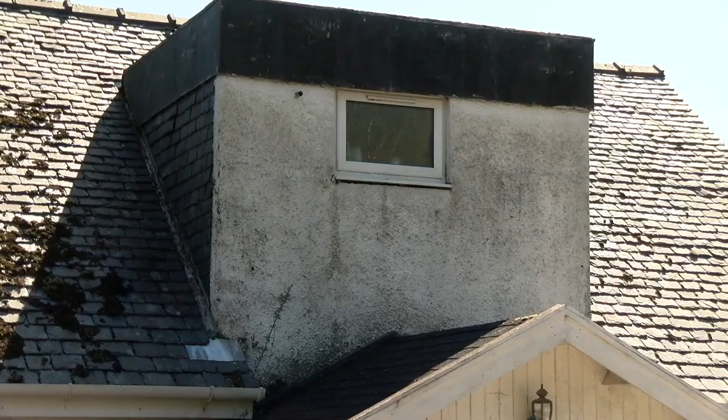This is a nearly completed EnerPHit of a 1975 timber frame house on the west coast of Scotland. We had been living here for 5 or 6 years before we decided to start the retrofit, and the motivation for that was on multiple fronts really. The house was too cold, it had damp and mould problems in places, it was expensive to heat, but also upstairs the space was really poorly laid out. It's what's called a 1.5 storey house, which is very typical for around here, where the slope of the roof comes down to meet the ceiling of the ground floor. And so the floor area available upstairs is quite dramatically reduced compared to the full footprint of the house.

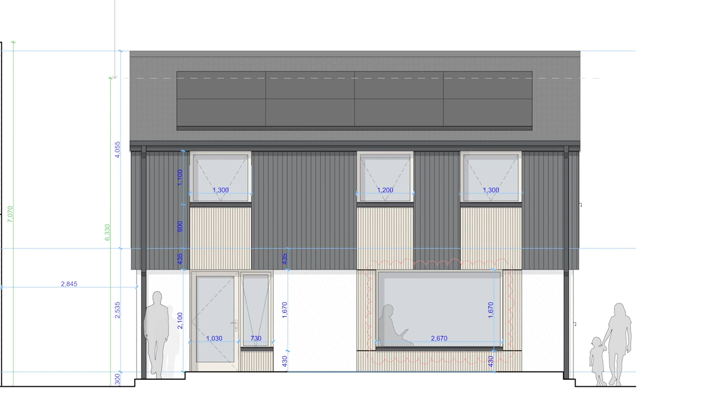The retrofit that we did was very radical in many ways, but addressed that. We did think about whether we should sell the house and build new elsewhere or knock the house down and build new here. The location where we are is really great for us. It's walking distance to schools, cycling distance to town, so we don't need to use the car much at all. It's 5 minutes walk to a train station if we're going further afield. So the location was really key for us, and that was the reason not to sell and build somewhere else. And then the question was, do we knock down and build new, or do we retrofit?

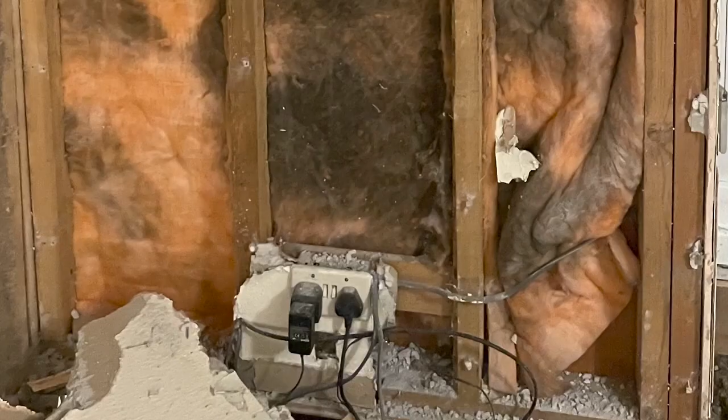And I'm pretty sure that what we did was cheaper than knocking down and building again. But also, from a conceptual point of view, knocking down buildings that have still got plenty of life in them feels the wrong thing to be doing in terms of carbon emissions, and using resources wisely. So yeah, we chose to retrofit, and before we started we knew that we had a problem with damp. We would get mould in the back of cupboards and in corners and sometimes around windows, and when we stripped the house back we realised that the problem was much more extensive.

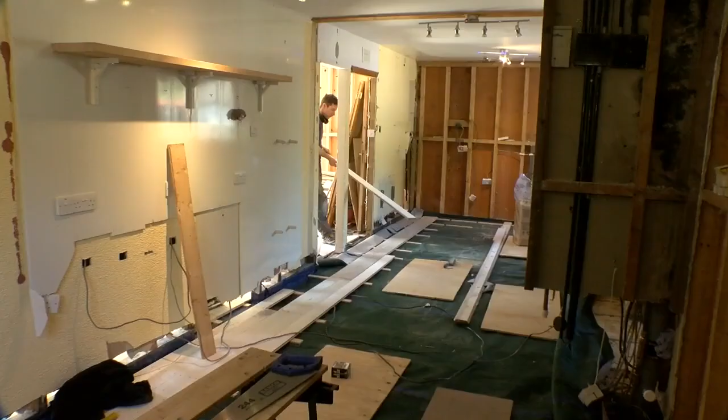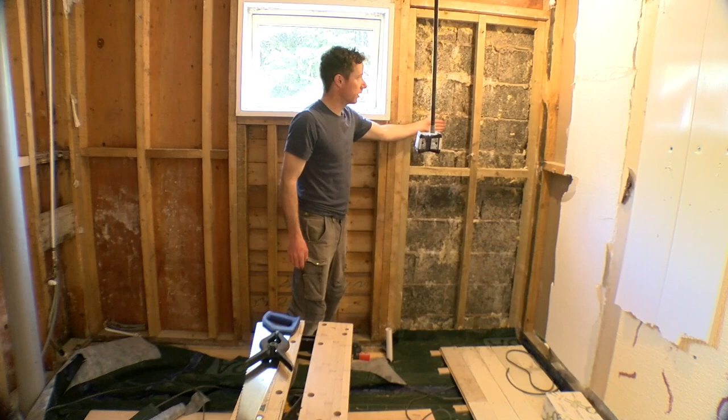We discovered quite a lot of pretty badly done work. This bit here used to be a doorway, so at some point it was filled in before me. And then the way that a timber frame works is that you want to have a ventilated cavity between the blockwork and the timber frame. They just filled this with insulation flush with the blockwork. They didn't reinstate the ventilated cavity, so that got really, really damp, and there was lots of black mould and had plants growing in it and all sorts of things.

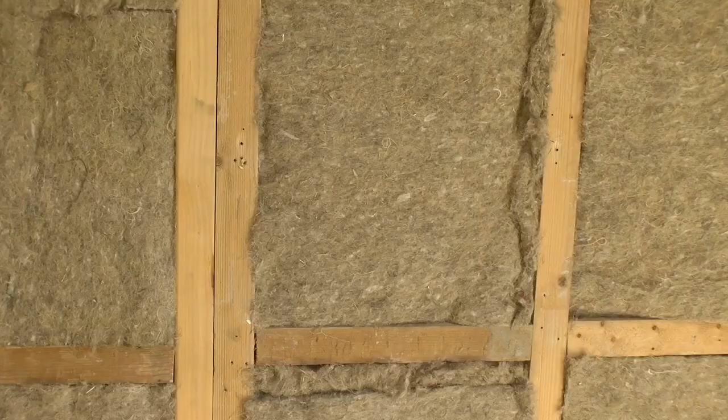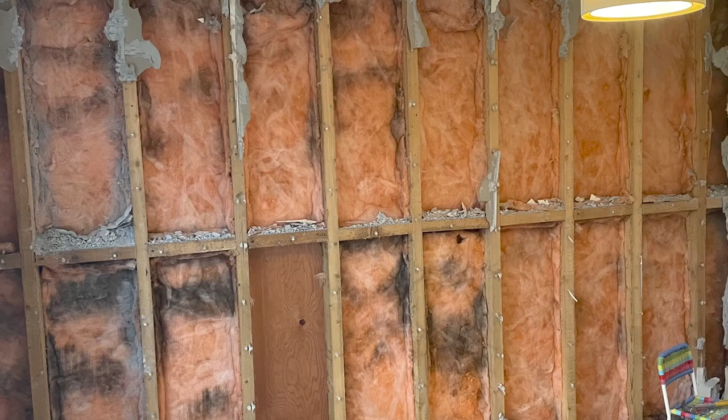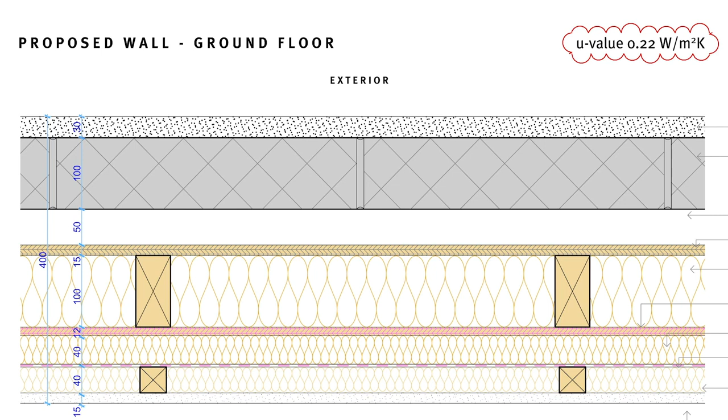And then we're going to have another 40mm of wood fibre board inside that, and then an intelligent airtightness membrane. Most of the time that acts as a vapour barrier, so it stops moisture from the room getting into the wall build-up. But in very sunny weather you can get something called reverse diffusion, where the sun is shining on the wall outside and it drives moisture from the outside of the wall through to the inside.

And because I've not been in control about what the sheathing board was on the outside, because that's pre-existing, I want the wall to be able to dry out in both directions. So I'm trying to make a wall that is very moisture robust. So I'm using hygroscopic and vapour open insulation, and then I'm using a vapour barrier that is variable so that it can dry out in both directions.

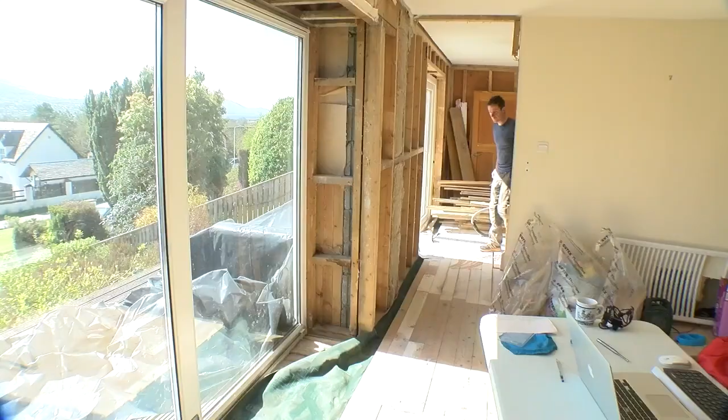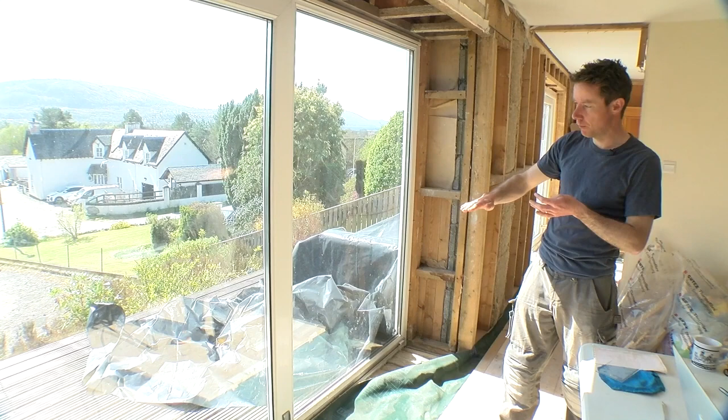So this is the living room, and we've got two big changes we're making here. When you're sat in a sofa over at the other side of the room, the view of Ben Nevis is split by this mullion, which always seems a shame to me, so we're going to replace it with a single piece of glass. Make it a bit higher off the ground to reduce solar gains in the summer, to reduce the overheating problem, because this room already overheats a bit on sunny days. So that will help a little bit with that.

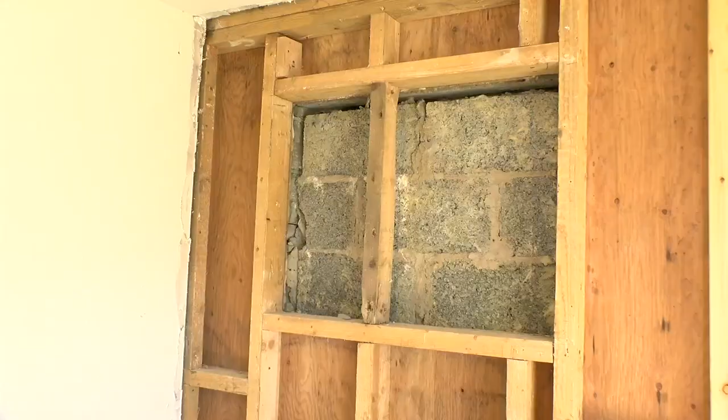We're also going to be putting another window in over there, where you can see there was a window before. I don't know why they took it out. We're going to be putting an opening window in there, so that'll even the light out a bit in the room nicely, and will enable us to cool the room when it gets too hot, because with this sliding door we found that you didn't really want to leave a whole sliding door open, so it would just get really hot in here in summer some days.

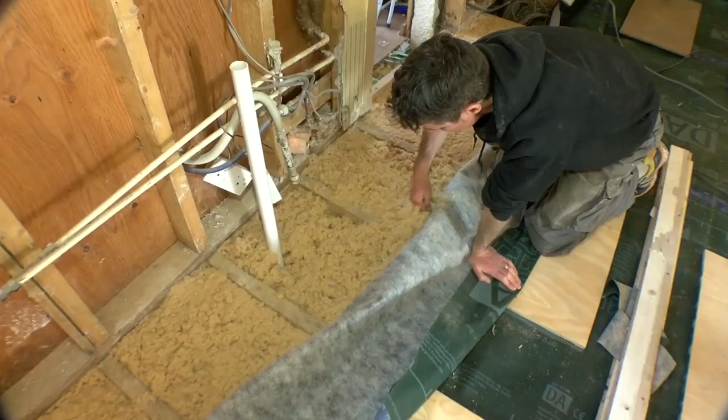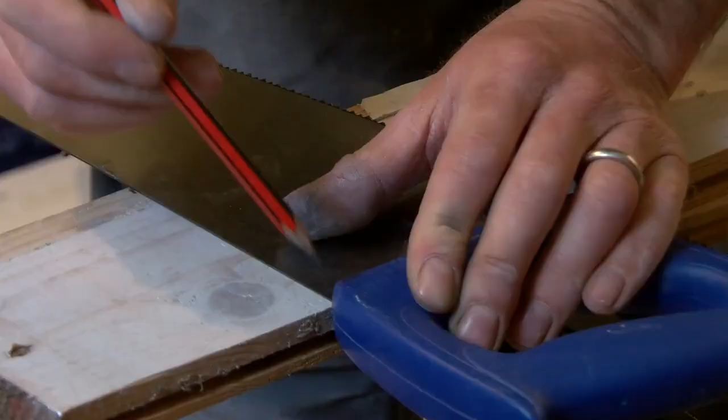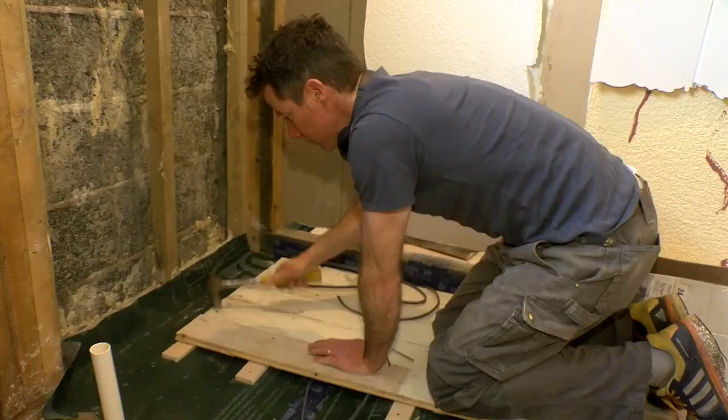Lots of what I did early on, well, everything that I did early on was DIY by me, and I always wanted to stay doing the insulation and the airtightness and the MVHR installation, partly as a kind of professional upskilling for myself, and partly just because I think those are the areas that the existing building trade is generally lacking lots of experience in, and I wanted to make sure that it was done really well. But I always knew that the bigger things that we were going to be doing in terms of taking the roof off and rebuilding that first floor, I was never going to do those as a DIY job. So we employed a local joinery contractor who were interested in doing Passivhaus and had some existing experience on it, and were keen to continue learning there.

Generally, clients doing part of the contract for us is a bit of a no-no, basically because it can complicate the contract sometimes, and also, your client-contractor relationship can get a little bit frayed if you're not moving in the same direction. But due to Es's background and experience with Passivhaus and EnerPHit, we knew that having Es would probably be more of a benefit to us than a drawback. So it was quite an easy decision on this project to let Es come on with us and work together.

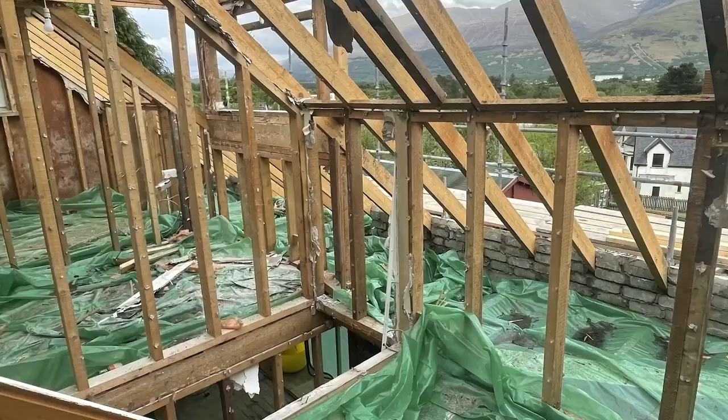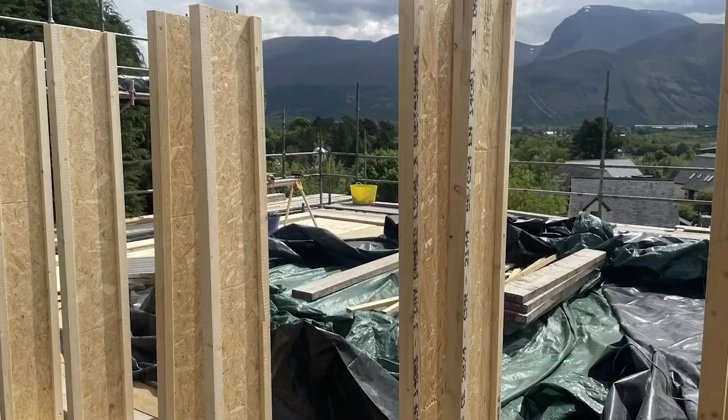The main job for us was to take the roof off. The actual roof design itself was quite complicated, engineer and architect drawings for it, and there was a lot of back and forth, shall we say, between us and the engineers, because some of the details were really complicated and there had to be a little bit of negotiation about how to go about them, because sometimes it's easier to draw it on paper than it is to do it in real life, and there were compromises made on both sides in the end, but we all got what we wanted to get the roof.

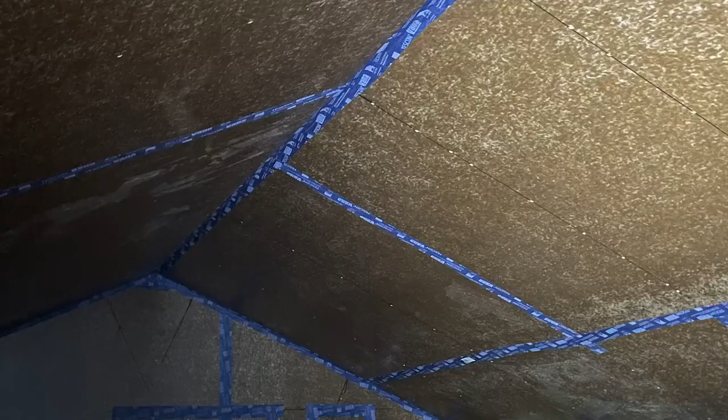Like, as I said, that was the main challenge, and the second challenge was the air tightness layer. So the air tightness board on the inside of the I-joist, putting the boards on and trying to have no gaps, trying to make sure the joints are taped around the windows. That was a real big part of making the project what it needed to be, because if you get these details wrong, the house would never have hit the target that we needed it to hit.

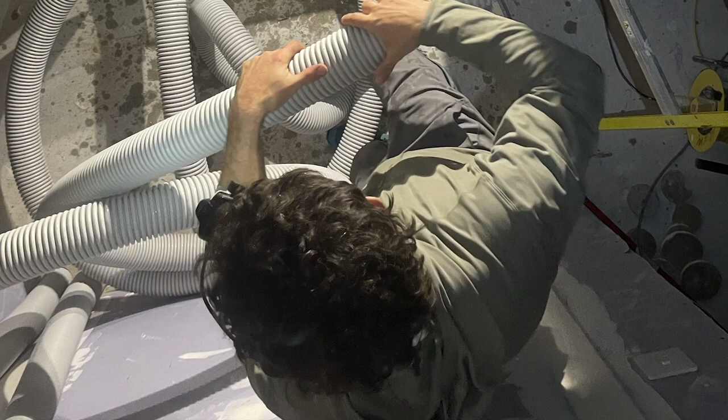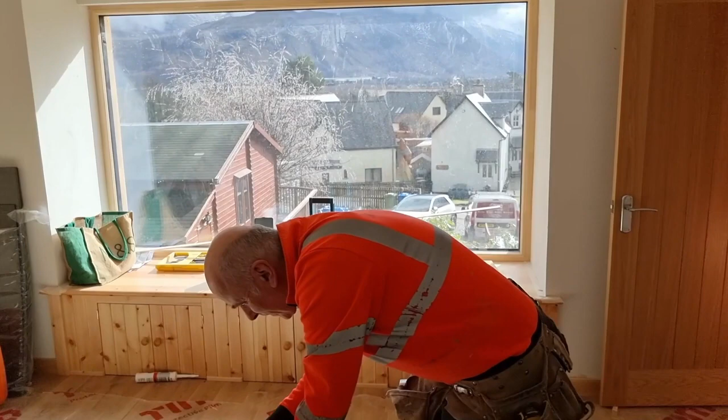It was challenging at times for both of us because I was never able to work fast enough to keep up with them. I was working in the evenings and at weekends. I was having to upskill myself, and they were a team of between 2 and 8 guys who were working full time and obviously had all the skills they needed already.

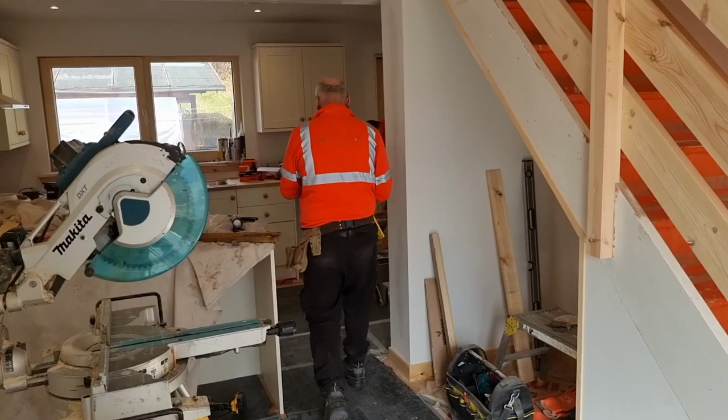There were several points where things happened too quickly and we didn't do an interim air pressure test, because to make that worthwhile you need to have the air barrier visible so that you can find leaks and fix them before the air barrier gets covered over. But by the time the builders were wanting to put the plasterboard up, I hadn't finished the air barrier in some places of the house, so there was no point in doing a pressure test at that point.

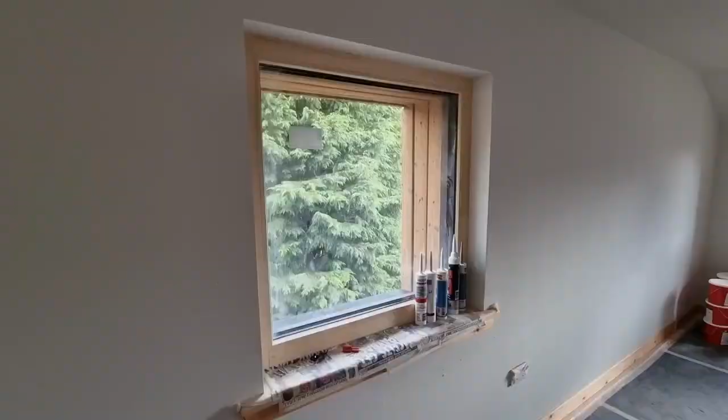And that's totally understandable. From their point of view, they want to go as quickly as possible, which is kind of what I wanted as well, because we wanted to be out of the house as short a time as possible. But it meant that that interim test that is usually very important wasn't done, and so I just had to do as good a job on the air tightness as I could and hope that it had been good enough. And we've just had the final air pressure test and we got a really good result for that.

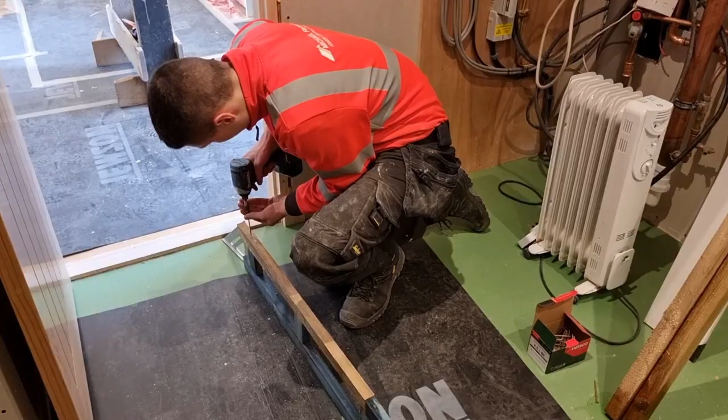Yeah, I guess a way around that would have been for me to project manage the whole thing and to employ different trades at different points in the process. I think that would have been more stressful than what we did. I think it was quite helpful having Steve project manage everything, and certainly quicker.

It's probably taken up a lot of our management time on it to pull it through to the finish line. But I think in the long term, what we'll take away from it as a company, what we've learned from it, it wouldn't frighten us taking one on again. And if we did something like this again, we'd be a lot more efficient than we were this time. So if you look at the company and our margins, we'd be more effective and more efficient at delivering the same thing.

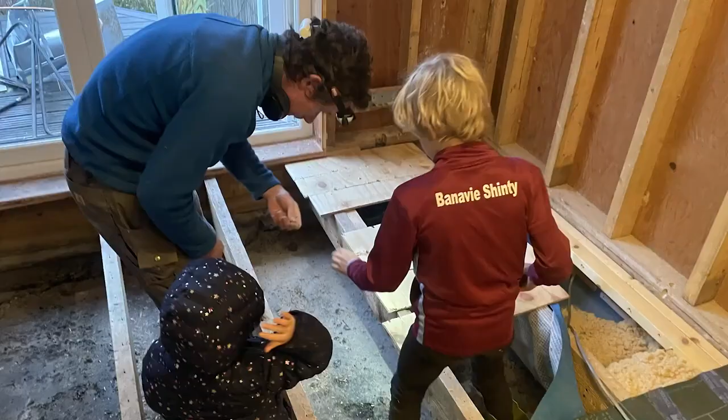The most annoying thing has been my dad being busy, but it's been interesting seeing what there is behind the walls of a house and helping. So I helped lift up the floorboards and put the insulation in there. I helped quite a bit with the air tightness and stuff. It's a lot better. It's more comfortable and a lot warmer. Partly it's because it's quite a bit bigger and I have my own room, and also it's just a lot warmer and nicer to live in, and got windows in better places, and it's just nicer in almost every way.

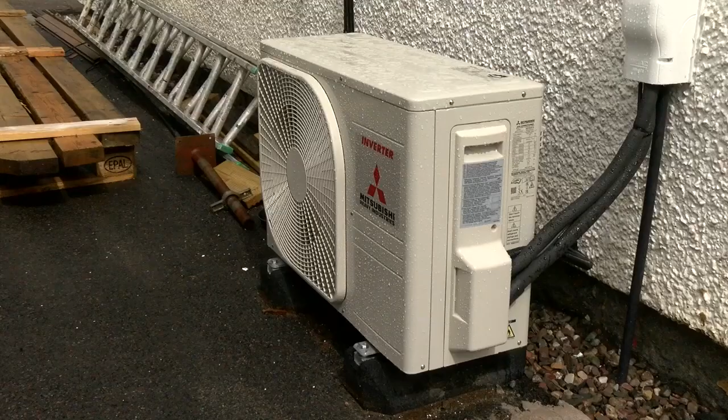The first week we moved in was pretty cold. It was nearly freezing overnight, and then maybe getting up to a high of 6 degrees in the day. So the heating was on then, and that was a really good test of this really simple heating system that we've gone for, of just a single air-to-air heat pump in the dining room, and that's heating the whole house.

Because our space heating is from an air-to-air heat pump, we need a separate way of heating our hot water, and this is a dedicated heat pump water heater. So it has a small heat pump that sits here that takes heat from the air. You've got an inlet here and an outlet here that I've just stuck that on to stop recirculating too much. And you can duct both of these to outside, or it can take the heat from the room. So I've set it up to take the heat from the room for various reasons, and that seems to be working really well. It's just a small heat pump that sits on top of a 200 litre hot water tank in this case.

Obviously it's only a month of being in it, but I'm really encouraged by how it works thermally. Loads of things that I knew about as a Passivhaus designer are still quite surprising, like taking a shower and then hanging a towel up. I took a shower one evening at like 11 PM at night, and the next morning my towel was bone dry, and there's no radiator in there, no heated towel rail. It's just, you know, a 20-degree room with good ventilation, and that dries things out really quickly.

So yeah, super comfortable to live in. Even when it's cold, we're walking around with just one jumper on, one sweater on. If you're a bit more active, you go down to a t-shirt. If you're a bit less active, you put your sweater back on. It's super, super nice.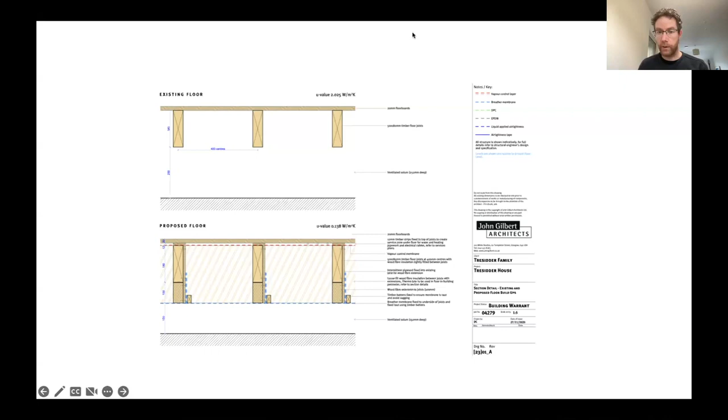And actually, I simplified it from this. I extended the joist with a bit of 9 mil ply, and I suspended a breather membrane between those joist extensions, and then I filled that with loose fill wood fiber insulation, the sort of wood fiber insulation that you normally blow into walls with a big machine.

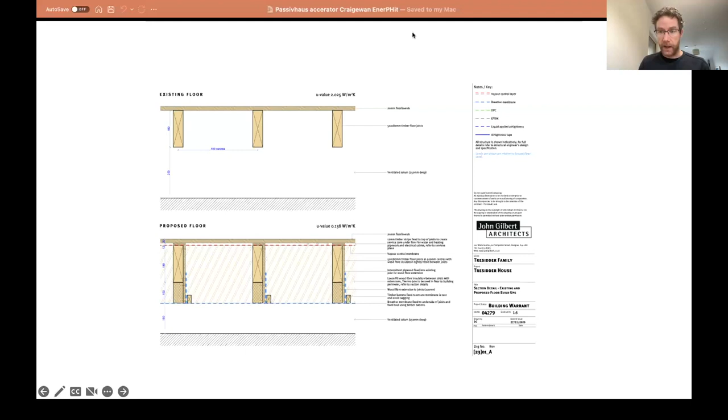But I was mixing it with a drill with a big kind of paint mixer thing on the end, and then putting it into the floor directly like that, and that worked very well.

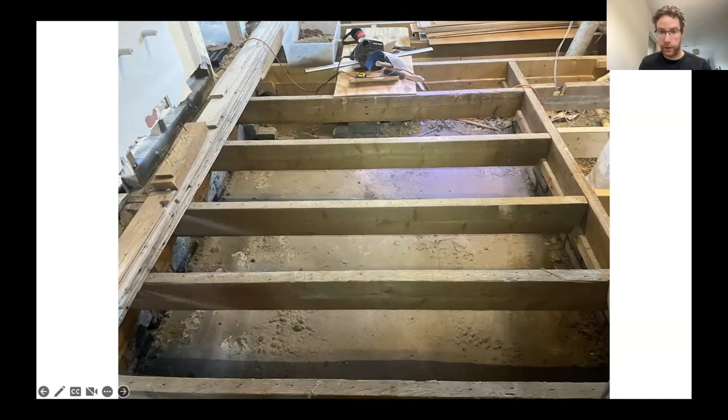So this is with the floor. This is what we were starting with. It was dry. Once all the rubbish had been taken out of it, it was pretty clean. So we didn't have an existing damp problem in the floor, which was a relief. The subfloor had a bituminous covering, so there's pretty low moisture input from the ground in this situation, which is good.

So you can see here I'm extending the joists with the 9 mil ply, and then suspending a breathable membrane, and that does several things. It holds the insulation in place, but it's also windproof, so that when you've got air movement in the solum, in the space underneath the floor, that's not getting into the insulation and reducing its effectiveness through wind washing.

It's really critical that that's vapor permeable, so that the water vapor moving through the structure can escape into the solum, and the solum is ventilated, so the moisture can then get out of there.

I think with the floor, this is one bit where I would really think carefully about how I'd do this if I did it again. Extending the joists like this was really labor intensive, and I don't think I would do it like this. I'm not sure exactly how I would do it. I've got several ideas, and if I get another project like this, I'll sit down and work out which one's best.

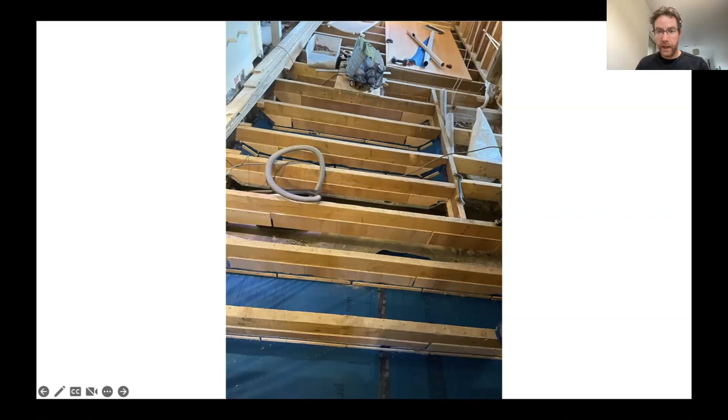But doing it this way was a lot of work for an extra 100 mil of insulation, was how it felt. And I actually had to do this twice. I'd put all the insulation in, and then I had to take it all out again because it all got soaked when we took the roof off. But that's another story for another day, maybe.

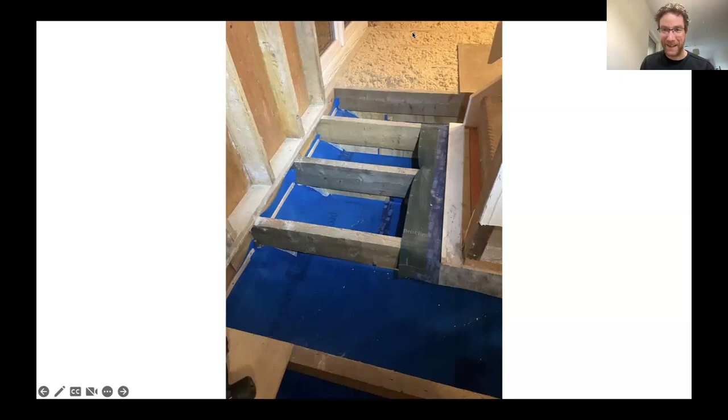So we were filling it with this loose fill wood fiber that you can see in the top of the picture there. We didn't take the stair up, and that gave us a bit of an airtightness headache. How do you make it airtight underneath where the stair is landing? Maybe we should have just taken the stair up, but at that point in my retrofit journey, I was still very wary of taking on big bits of DIY. I was still pretty fearful of those, and taking the stair out just seemed terrifying to me, so I didn't do that. I'll show you in a minute how we did the airtightness there.

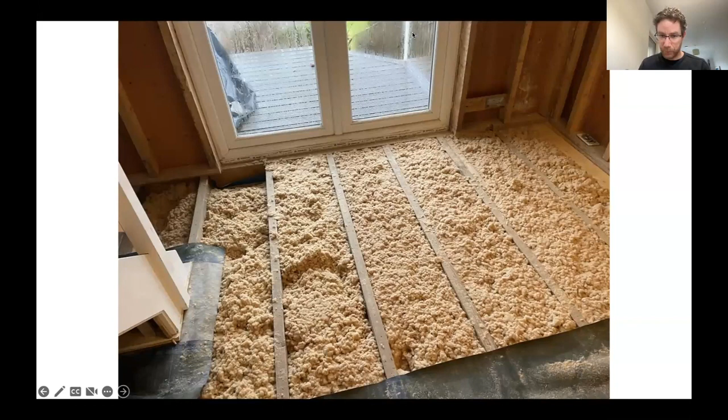So yeah, filling the spaces that I'd created between the joists with this loose fill wood fiber. That was really good because we had complex spaces to fill. It was really good at filling all the spaces with no air gaps. But it was quite a lot of work to get in. And compared to other natural insulations, it's very cheap. So it's kind of swings and roundabouts. It was very cheap and very effective, but it was a lot of work.

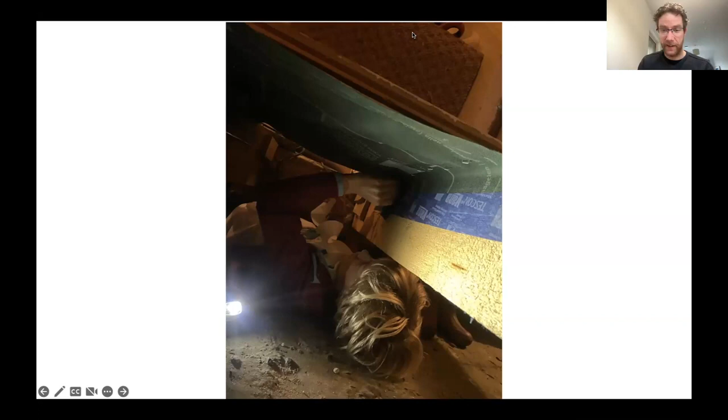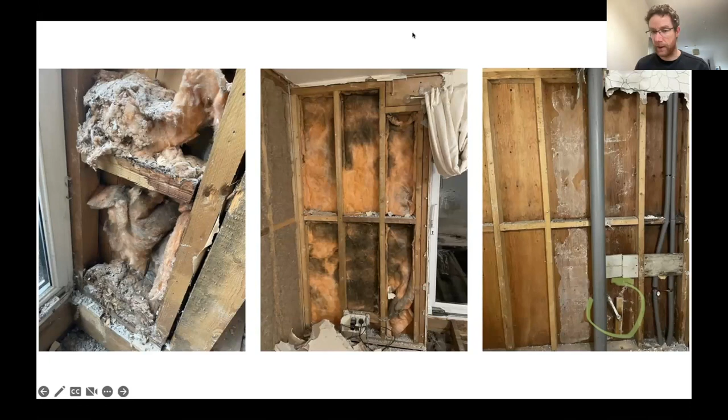And I would have had a cold corner that is already a geometric thermal bridge, and it's a corner, so there's less air flow around it. And I think you'd just end up with a load of mold internally if I'd done that. Or that would be the risk. Maybe it'd be all right with MVHR, but that would certainly be the risk, I think.

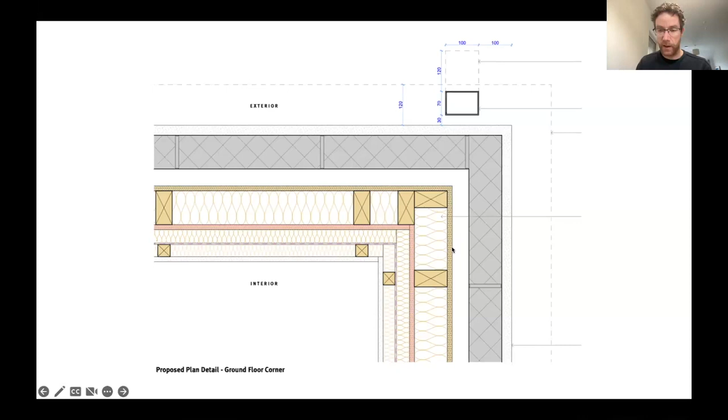So this was filling the walls with the hemp and jute batts. These come conveniently sized to fit either 600 mil center studs or 400 mil center studs. My house was sometimes 400, sometimes 420, sometimes 360. It was all over the place, so I was having to cut them quite a lot. If you have to cut natural insulation, get an insulation saw. I tried all sorts of saws before finally spending £30 or whatever on an insulation saw, and wished I'd done it earlier.

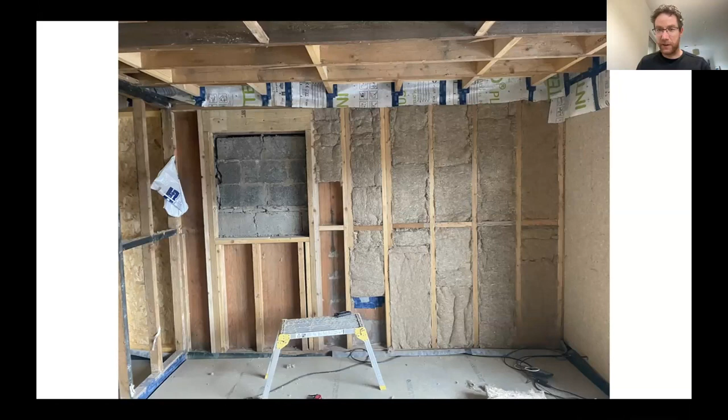Lots of studs were a little bit apart, and you had to poke insulation into them to make sure that there weren't any gaps in the wall build-up. And all of this, like you can see there, there's 3 studs right next to each other and another stud right there. And if we hadn't been adding the wood fiber insulation inside of that, I don't think it would have been a moisture risk problem, because the wood is okay, but you would certainly have ended up with a surface that was colder than the rest of the wall.

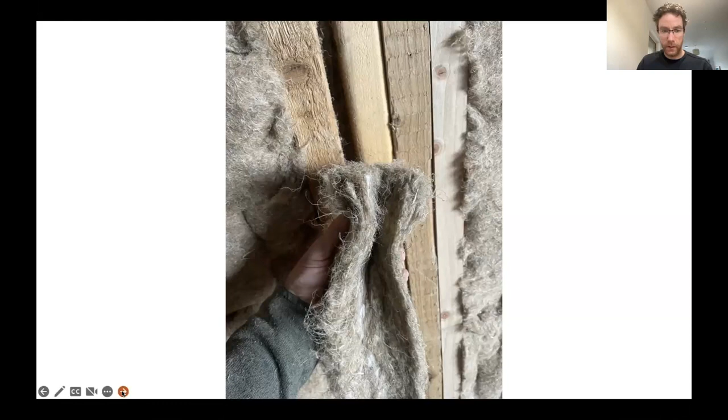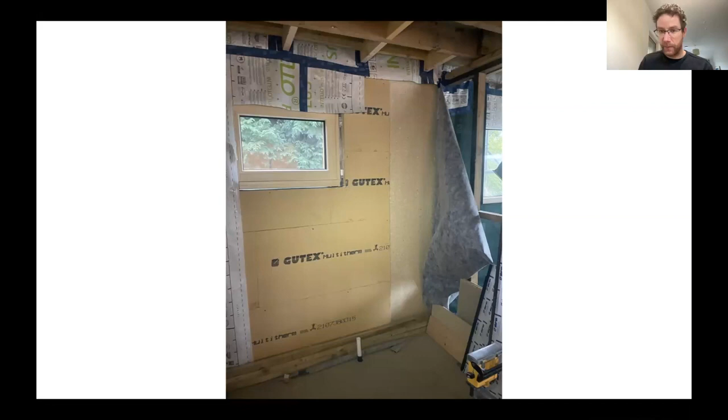And then window reveals. Some of this was worked out beforehand. Some of it was worked out on site. I had bits of 20 mil insulation left over that I was able to cut to fit exactly into the window reveals, and that gave a good edge for bringing the membrane round and then taping it to the windows.

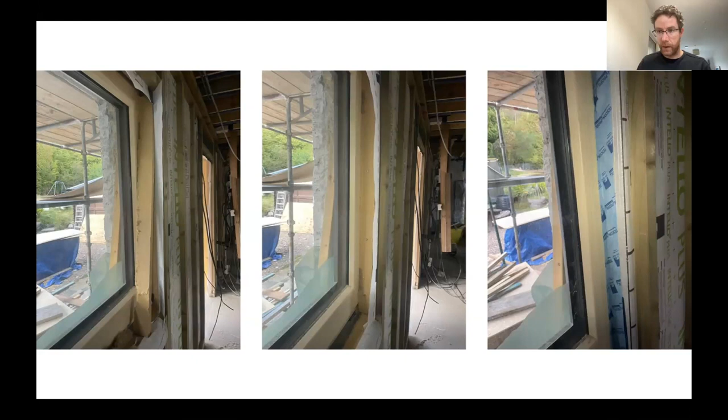If I did windows again, I think I would tape them before they went in. I'd use split release tape, which I did use, and I'd tape them to the window frame and then put them in, and then have the second release tape to use separately. The way I did it was effective, but it was quite fiddly, and there are a few places where you can just see a little bit of tape internally.

And then upstairs we did an I-joist frame effectively, and there are a few bits that we could have done better there that are more relevant to new build, but I think are easily missed. So here we've got a junction that you can't access this point here from inside. So for blowing the insulation in, you blow these spaces in from the inside. But this space, you have to go out on the scaffolding and blow it in from the outside, which is annoying if it's raining. And it's often raining in this part of the world.

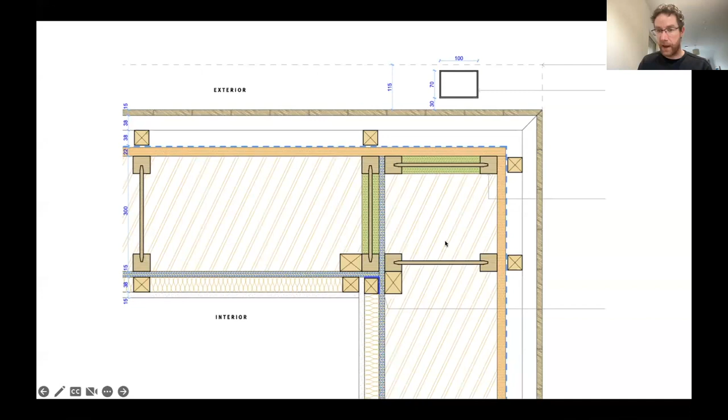So make sure that your stud arrangement at the corners gives you a path, so that you maybe have one of these offset down here somewhere. You need to clear it with your structural engineer so that you've got a path into this space for the blown in insulation.

This is the junction between the ground floor and the first floor. So this was a bit of a structural engineering headache for the structural engineer. And effectively we built like a ladder here, and that enabled us to build a solid platform that we could then build the first floor walls off. So it's not loading this blockwork wall. All of the load is through this timber frame here.

So that worked well. There are a few things that I would do slightly differently, mainly with the weatherproofing of it. I put the insulation in, and then we tried to weatherproof it, but these joints were open, and basically the rain would come down here and then track through these joints, and this all got completely soaked, and I had to pull it out and then do it again once the other parts of the walls were finished. So I think I would try and find a better way of doing that.

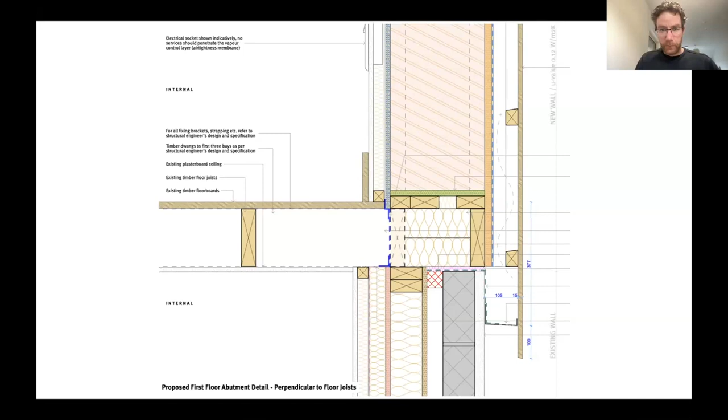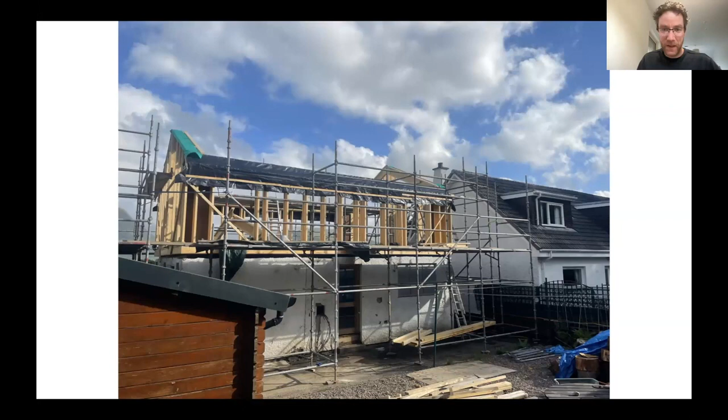And I also had to go around measuring them to check whether they were wide enough to have the insulation pumped into them from inside. And if they weren't, I was having to pre-fill them. I may have only had to pre-fill one of them, but some of them were quite tricky to fill. And actually the drilling of the hole in the airtight board is quite hard and quite time consuming. So you want to limit the number of holes you have to drill, and make sure that they're all spaced as well as they can be.

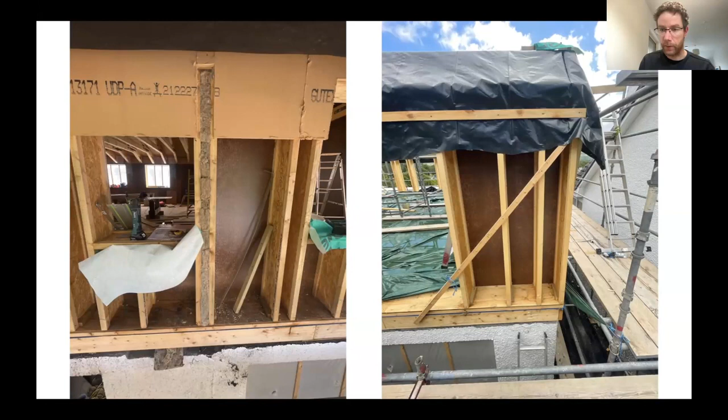And yeah, I guess I'll just open it up for questions from there. Really, that's me. That's my presentation done.

Thank you, Ez, very much indeed. That was really inspiring. And you just touched on the trauma at the end. I could sense it throughout.

Mentioned more than one layer of insulation needing to be removed due to water damage. And yeah, I can imagine you're probably just scratching the surface.

I mean, that was a big thing for me. Basically a big learning point for me was just how hard it is to keep water out of buildings when they're not finished. Basically all my experience is computer based until this, so it was a really steep learning curve. We were offered at the start of the project to tent the whole thing, but that in itself was really expensive. I think we were quoted more than £30,000 for tenting it, and so we decided not to.